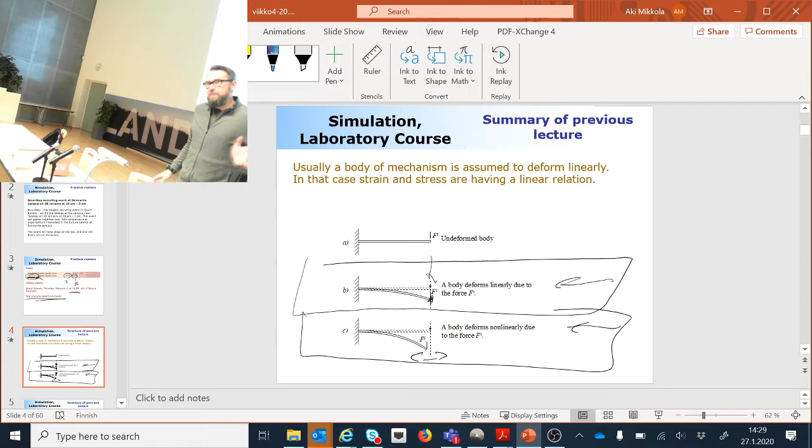Okay, so then last week we shortly looked at the lumped mass approach. And the lumped mass approach is a method that is, strictly speaking, not within the family of flexible multibody dynamics. And why is that? That's simply because the theory, the kinematics itself, has no changes with respect to rigid and flexible bodies. This method takes the original body, which usually has to be a beam-like body like this, and divides that into a number of rigid bodies. And between the rigid bodies, there are spring elements.

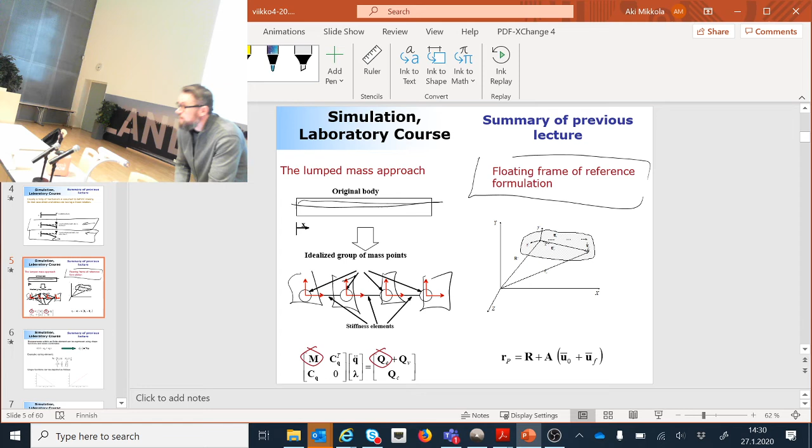So that's why there are no changes in the kinematics. You're just adding more components, bodies this time, and external applied forces. So that's all you need. The floating frame of reference formulation is what we're really going to take a look at in this class, and you really need to learn where the name floating is coming from.

We are changing the kinematics. So this is a kinematics that is using a floating frame reference formulation. And there is a big difference, seemingly small difference, because vector U bar now consists of two components: the one that shows where the particle is originally located, and then another component which shows the deformation of the particle. Seemingly just a little bit of tuning, adding one more component, but it changes everything, absolutely everything. And that's what we're gonna look at in this class.

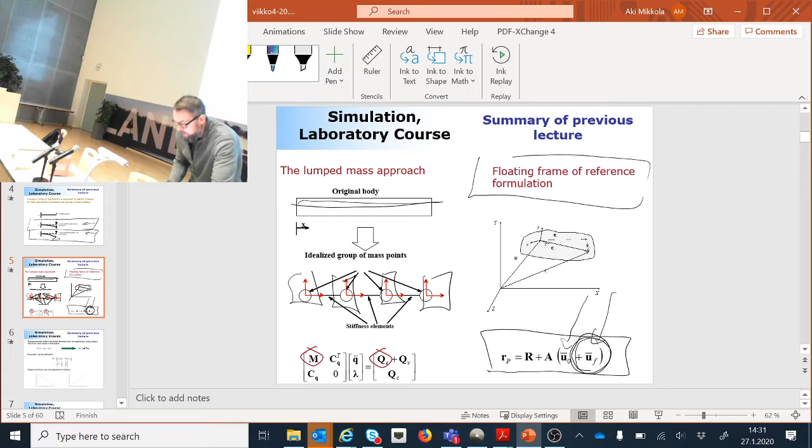And now, what we're gonna do is describe this deformation by using a finite element method. We already learned a little bit about the finite element method. Shortly speaking, the finite element method is all about the internal life of one element. Last week we looked at one simple spring-like element which has two nodes. Excuse my drawing. So one node here, another node here. And these nodes were able to move back and forth along the global x-axis direction. So it's an element like this.

So these nodes can move back and forth, and this is an element that consists of a total of 2 degrees of freedom. Where do these 2 degrees of freedom come from? This node here can move left or right, so that's 1 degree. This node here can move left or right, so that's another degree. Now, if I would add one more node in the middle, this would be an element that consists of a total of 4 degrees of freedom.

Correct. 3, exactly. I was just checking if you're still alive.

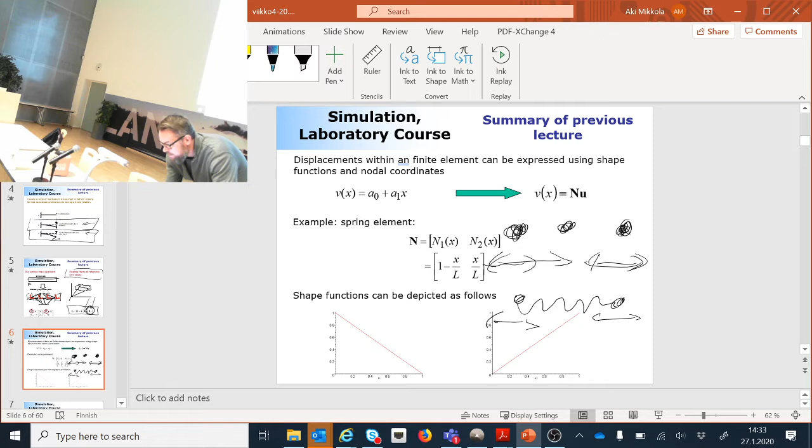3 degrees of freedom. And where they come from: this one can move back and forth, this can move back and forth, this can move back and forth. That's it. Now we know the number of degrees of freedom. What we will do next is approximate the internal life, like the soul of this element, by using polynomial expansion. The polynomial expansion in this case is selected such that I have a constant value, a0, and then a value that is linearly related to x, so a1 multiplied by x. This is my polynomial expansion, and this is really the soul of the finite element method.

I could use this polynomial as it is and solve the unknowns, and the unknowns this time are a0 and a1. That would be the end of the story. The problem with these unknowns is that there is no clear interpretation in real life. If you get a1 and a0, what does that mean in real life, what kind of deformation? Of course we can think about it, but there is no clear physical interpretation. So that's why it makes sense to convert these unknowns to be expressed by nodal degrees of freedom. And that's exactly what we did last week.

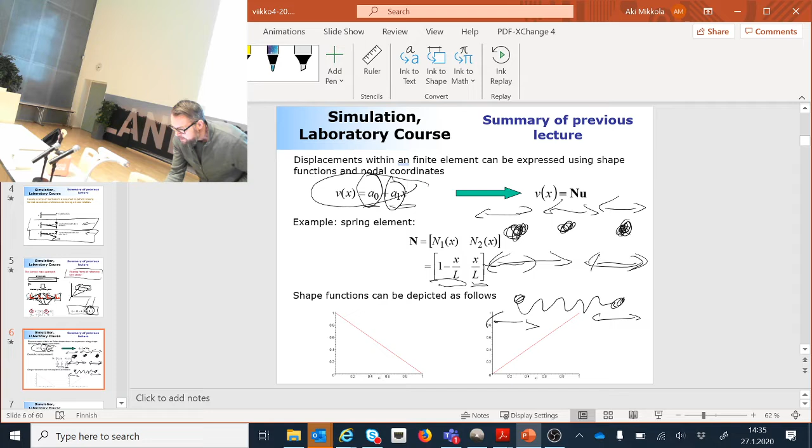Okay, so quite far off. So you say that I can go as far as I want. No limitation. That's not true. There's a limitation. So where should I? Let's try this again, because I was kind of hearing that someone was saying stop here. Okay, let's try again.

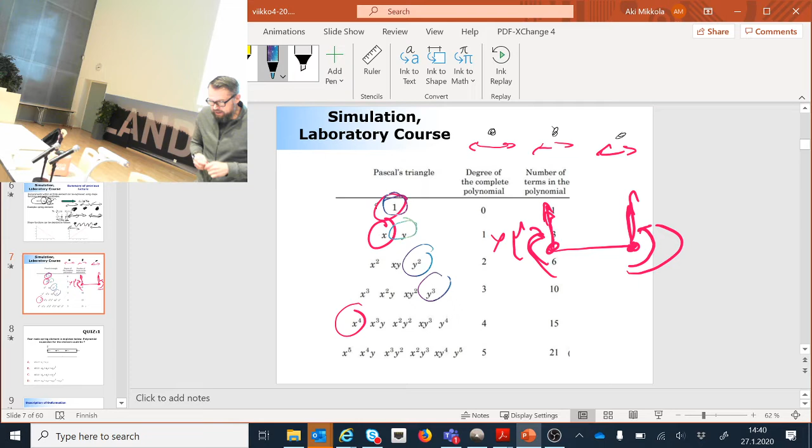Okay, here's a question to you. Now, I have a spring element, and I'm having 4 nodes, and I'm asking what kind of polynomial expansion I can use to create the shape function. Only one is correct. Let me put the Socrative on.

Oh, the Socrative is, okay, so hopefully this works fine. What? Is it that I don't have internet access? No, I should have internet access, because I'm streaming all the time, so it should not be a big issue. Huh. What's going on? It works fine. Okay. This one. Okay, so I can see that you're pretty much all in. Oh yeah, but this makes no sense to look at that. So let's look at something else.

Let's look at this one. So I have a 4 node spring element, meaning that the elements can move only left and right. So what is a polynomial expansion for this problem? You already know what's the correct answer? Should I take a look at how my Socrative is here? Okay, so half done, half is still thinking. This is not that simple, is it? Semi-simple, let's put it this way. Why this is confusing, I will tell you in a minute.

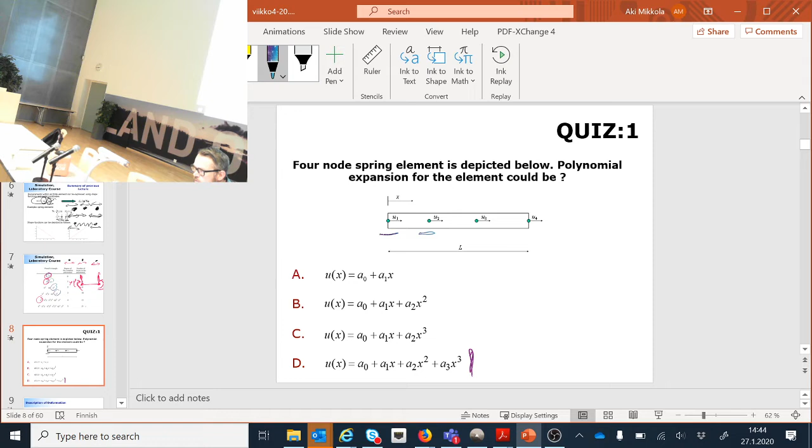And now here I have 1, 2, 3, 4 degrees of freedom. So my polynomial expansion must have 4 components, because I have 4 unknowns. Now, this is not good because it consists of 2 unknowns. I cannot select that. This one is no good because it consists of, again, 3 unknowns. This consists of 3 unknowns as well.

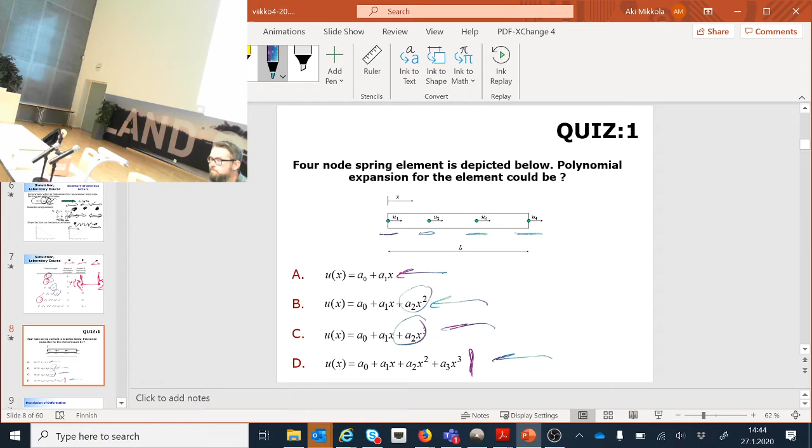I know that this is what makes you confused, but you should not get confused about that. This is the only one that consists of that number of unknowns. Okay, so let's move on. Let's look at something else.

Now, here is a beam element, and this beam element is exactly like I explained in a previous slide. So this is the one that consists of 4 degrees of freedom. These 4 degrees of freedom are translation along the global y-axis direction in this node, and the same in this node, and then the rotation in the first node and the second node.

So you already know what's the polynomial expansion for this kind of element. It's a polynomial expansion that consists of 4 components. Correct. Now what I will do with this polynomial expansion, I will change my polynomial coefficients to be expressed by nodal degrees of freedom. That will give me shape functions. And the shape functions tell me how the particles are moving with respect to each other in different kinds of scenarios. And these scenarios are all related to nodal degrees of freedom.

That's it. Then this will be later used mechanically to derive the stiffness and mass matrix, whatever you want. But that's mechanical, very mechanical. The only thinking you need to do is when you select the polynomials and understanding how the polynomials will affect the shape functions.

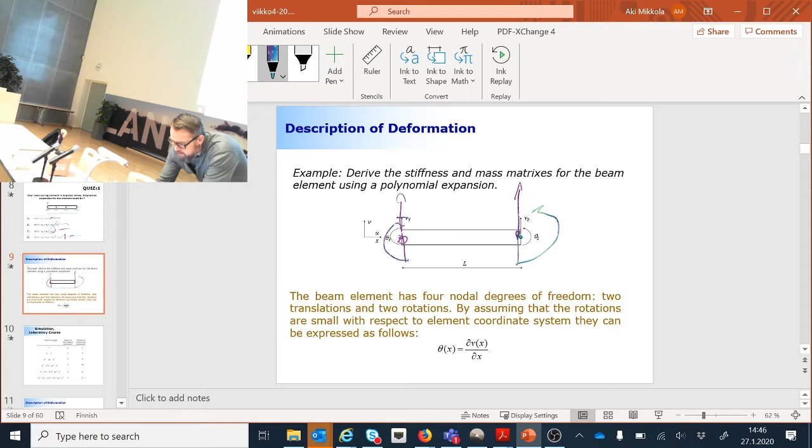All right, so now here is an element where I'm assuming this motion in the y direction and angle to be related via this kind of partial differentiation. This is a common assumption if you're dealing with an element that is not able to describe transverse shear deformation. We are not going to move deeper in that direction, but strictly speaking, elements can be divided into conventional elements like the Bernoulli beam element that cannot describe transverse shear deformation, and Timoshenko beam elements that can capture transverse shear deformation. But let's just leave it at that level this time.

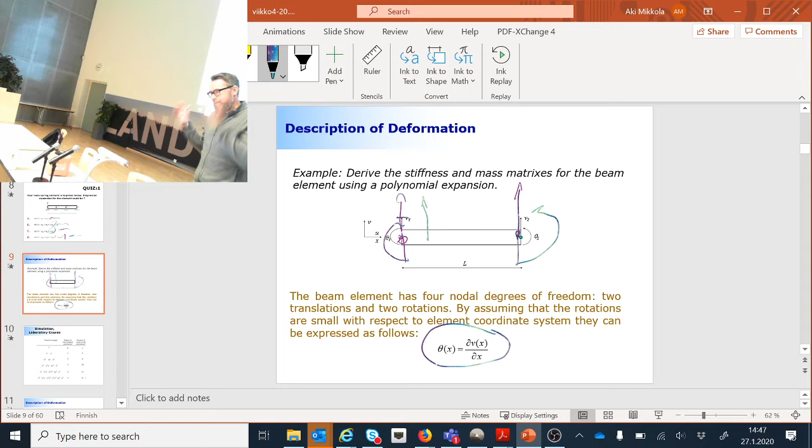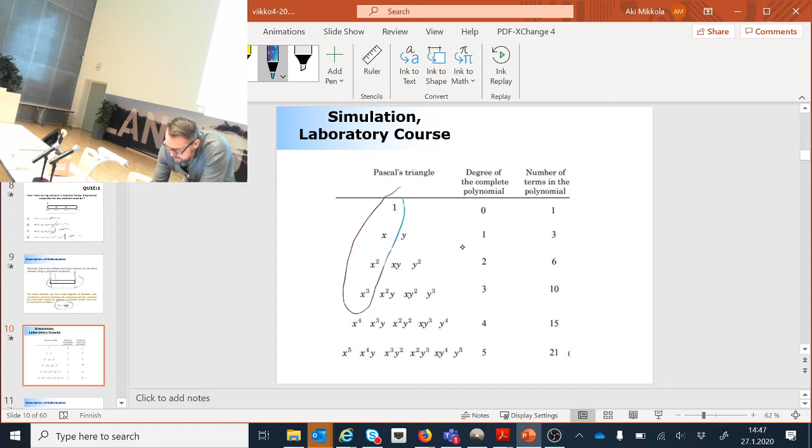Okay, now a bit confusing is that I'm going to select my x coordinates, the one that I'm describing my motion in this y direction. I, of course, realized later that I should use these y coordinates. Again, I can select 4 components, and I'm going to select them like shown here. Okay, that's it. Now, here is something that I need to get back to a little later. You need to remind me to get back to this.

Yeah, so we still have plenty of time, so no worries.

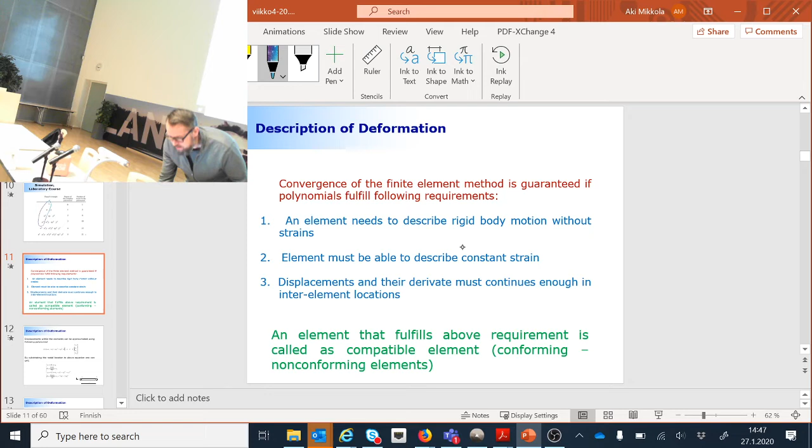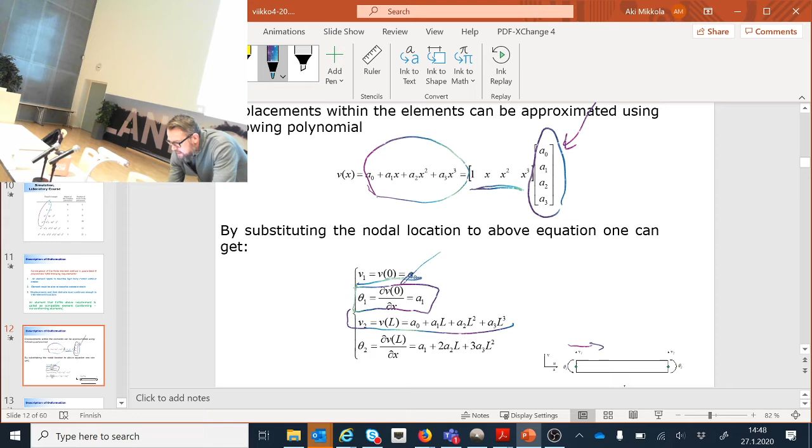I can make it happen by using the information about where these nodes are located. The first node is located where x is equal to 0. x is measuring this direction, so it's going to give me this equation. The next one is the equation differentiated with respect to x, and x again is 0. And then this one here is when x is equal to L, and the same thing here when x is equal to L. Now, here are my nodal degrees of freedom and my polynomial coefficients. This is a matrix that I need to invert in order to find the relation between these 2 items.

And remember this famous thing about a matrix that consists of 48 times 48 components. That's what I was doing. Now it's already becoming harder because this is 4 times 4. But it's nowhere near the nightmare that you're facing when it is this much. Still every now and then I wake up in the middle of the night and I can see these numbers in my dreams. So they are devil's numbers.

Okay, so now here's my A. I will just go and substitute that into this equation. It gives me shape functions.

Now, this is how the shape functions look in this beam element case. And now comes something that is very important. These shape functions are orthogonal in the sense that if I look at the first shape function, which is written here, this is the one that is associated to the y displacement in my first nodal degree of freedom. It is not introducing displacement to any other nodal degree of freedom. And that's something that is very important.

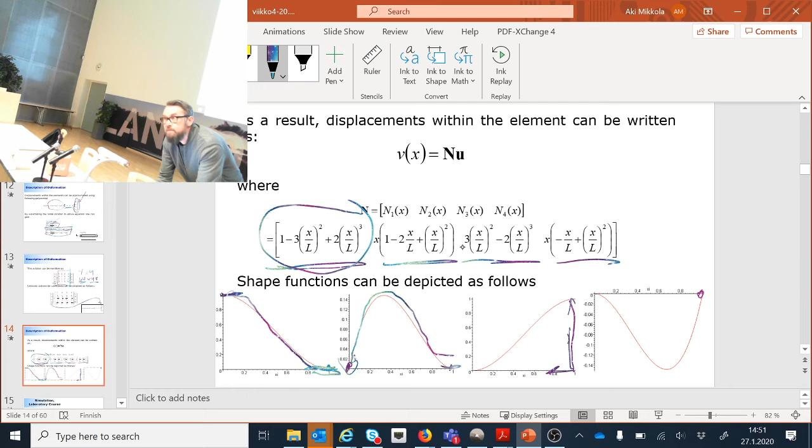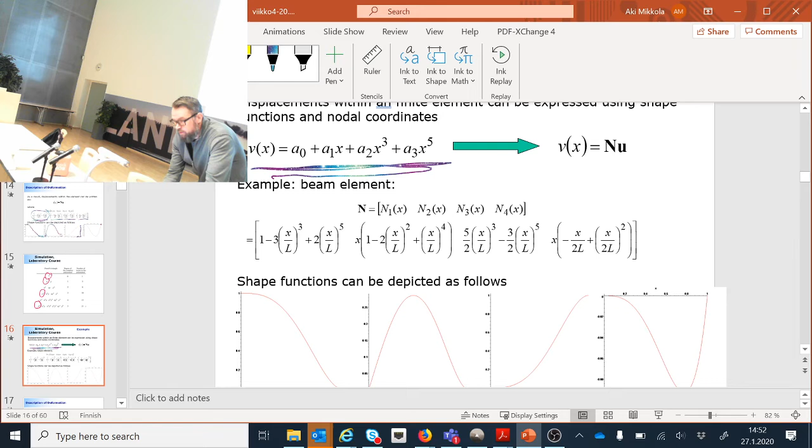Okay, so let's see. Is it going to be any different? Yes, it will be different. Now it's going to be a little hard to see how it is different, but if you go and compare the behavior pattern in this case and the previous case, they look different. Which one is correct? This is, by the way, an awfully difficult question.

Now, give it a shot, because I can promise you this. If you can answer this correctly, next Monday there's a lot of candies. Because I go on Tuesday and collect a lot of candies and bring them to you.

Which is correct? You said the first one. Others? You say both? Come on, both. Is it possible? Because in mathematics, it's only left or right, but not both. Can you select both? Yes, you can. Both.

Candies. So it's a candy party.

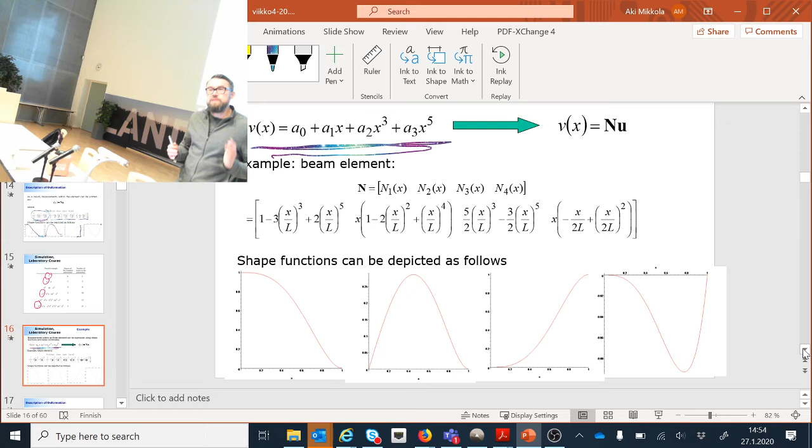Nice. So both are correct. They're different, but they're correct. I'm not violating any of the principles when I do this. They most probably behave in a very different way. And to be able to answer how they behave differently, we need to look at something that is called convergence. The finite element method is an approximate method, and it produces better and better solutions when you're increasing the number of elements. And typically, displacement-based elements approach the correct solution from the stiff side.

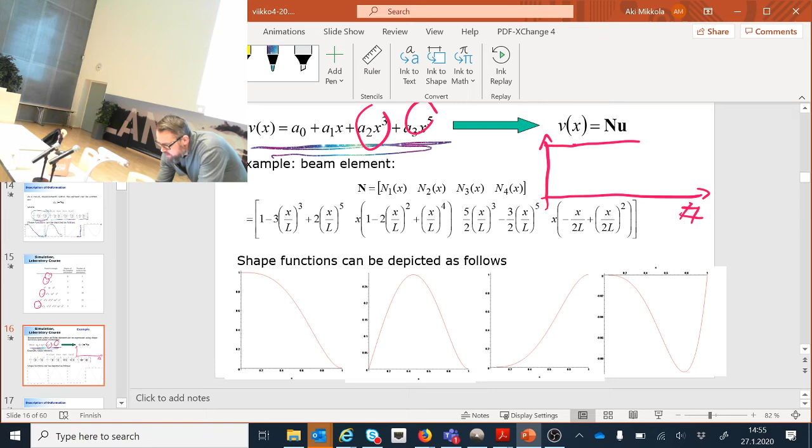But if I'm selecting these polynomials like I did in this case, third order and fifth order, it is not guaranteed that it approaches the correct solution from the stiff side. It could actually approach the solution from the other side as well. Let me see if this becomes clear enough. So let's say that I have here number of elements, and here solution. And let's say that this is the correct solution. Typically you get a very stiff solution when you're using not enough elements.

So let me change the color here. So you typically get solution convergence that gets better and better like this. So it's able to produce better and better solutions when the number of elements is increasing. This is typically how the element behaves if you're selecting these polynomials in the order they come directly, without any skipping.

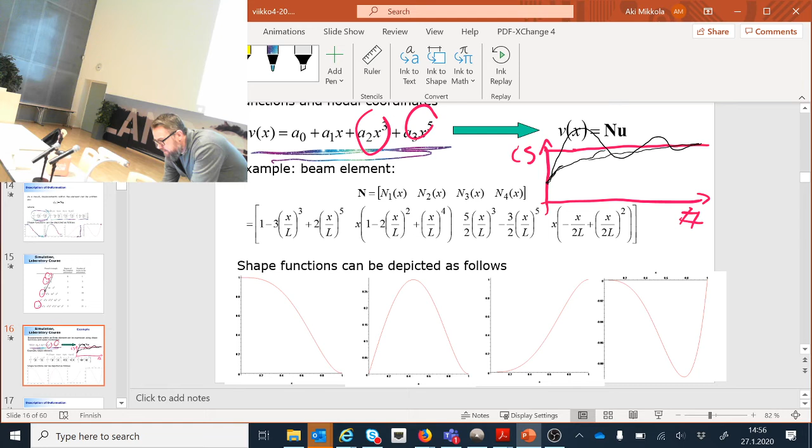Conformal elements, that's how they are called. But then there is a family of non-conformal elements that can approach the correct solution, for example, this way. They started here, but they're vibrating around the correct solution, and then they converge to the right solution. It's possible too. The only way you can guarantee that they are converging from this side is by using conformal elements, meaning that the polynomials are selected in the proper order.

Okay, but again, like I tried to explain here, the finite element method is all about internal life, about nodes. And this internal life is all about the polynomials. Polynomials are defining how the finite element method is performing. You knew this already, at least on a certain level.

So you heard the story. How come you were able to select that both are correct then? I'm kind of sensing that there's a little bit of cheating from your side. No? Are you just that good? But no communication, no further communication. I understand that. All right.

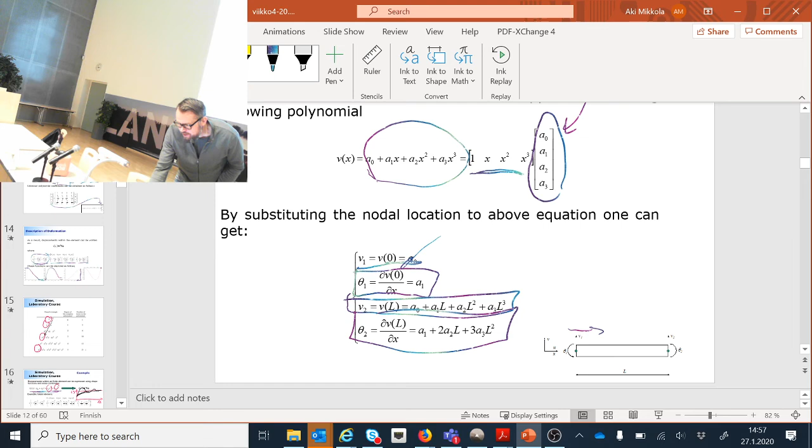Okay. Now, let's go back to this, and then we're going to move. Now, to be able to make an element that is converging, it's not guaranteed that you get an element that is converging, because if you select these polynomials randomly, then you can get really nice elements, but not converging to the correct solution, which is a really significant problem. But this is, by the way, not yet guaranteed, but you must be able to fulfill these minimum requirements to have elements that are able to converge.

The first one is the element has to be able to describe a rigid body motion without strain. This one here. Okay, now you should not mix this with rigid body motion in multibody dynamics. It means that if the element is in this configuration or this configuration with respect to the global coordinate system, it should not give any strains. So if I have no deformation in this configuration or in this configuration, they should behave in the same way. How can you guarantee that? By selecting polynomials from this Pascal's triangle such that the first component is this one here. This guarantees that the element can describe rigid body motion. So it's not a function of body displacement or orientation.

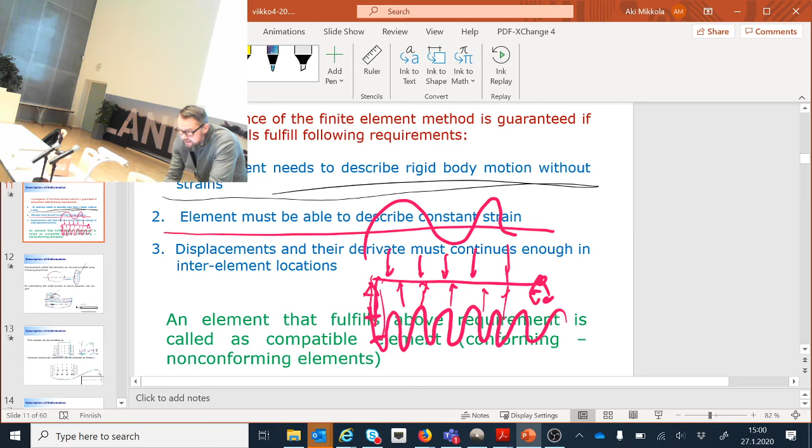Then the final one really depends on your application, because it says here that displacements and their derivatives must be continuous enough at inter-element locations. Meaning that within neighboring elements, there cannot be gaps. And that really depends on what kind of mathematics you need to describe the stiffness matrix and the inertia matrix. But let's look at the final requirement a little later. Now, if I'm selecting these polynomial orders as they are, then I end up with a conforming element. And if I select them in a more random way, I have non-conforming elements. That's how it goes.

So, we were here. Now, in this case, this particular beam element, I'm describing my strain displacement relationship, first of all, such that my displacement and rotation angle are related using this equation. Let me make a better drawing here. So I'm simply looking at the midline of the element. I'm looking at, for example, this line here.

In order to compute this tangential here, I can do that with my partial operation like shown here, right? This gives me the tangent of this middle line. Now, if I'm using the skew symmetric matrix in the planar case, if I rotate that by 90 degrees, I will get something that is perpendicular to my tangent, right? And that I can do by adding the minus here. Let's just simplify it like that.

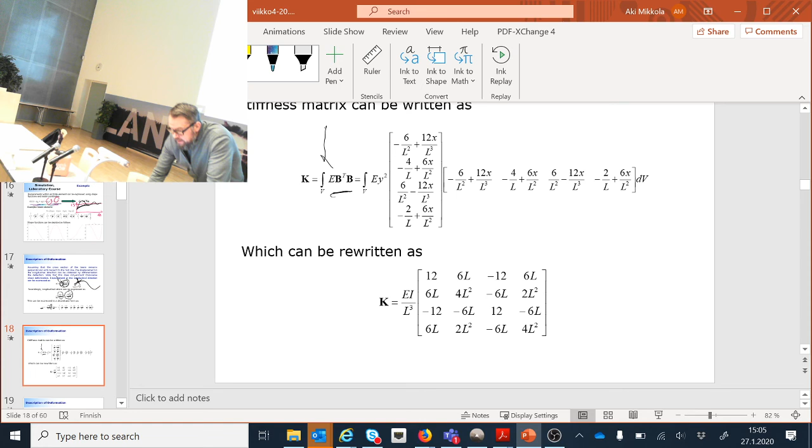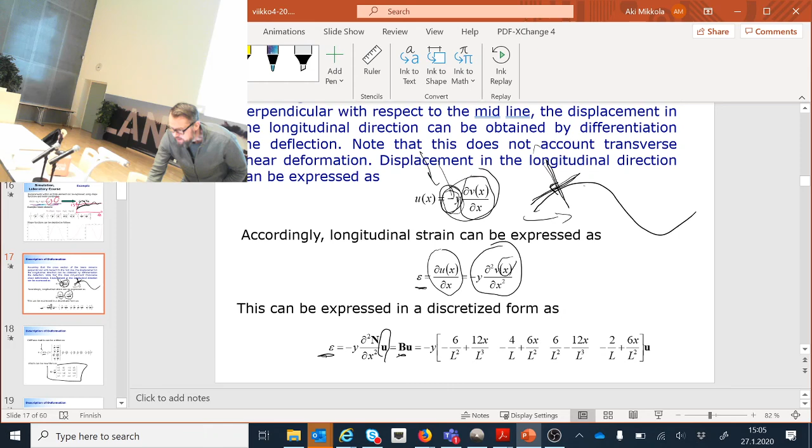All right, that's what I need in order to compute the stiffness matrix, and I can get the stiffness matrix by simply taking the kinematic matrix and its transpose and multiplying like shown here, and then I have my elastic coefficient, and that's it. That's going to give me the stiffness matrix like shown here. It's very mechanical, and you use a symbolic math tool, so it's very straightforward. The only thing that is not straightforward is the selection of polynomials. The rest is mechanical.

Okay. Now, this is where we're going to stop, because we need to discuss something very different from the finite element method. So this was a news flash, or introduction to the finite element method. And this is the level of difficulty at which we're going to leave the finite element method. No more difficult than that. Let me summarize this, because I want to keep on repeating.

So the finite element method is all about how you're assuming particles between the nodal locations are behaving. This behavior can be described with the help of polynomials. And it doesn't matter what kind of element you're looking at, it's always the same story. If you're looking at the plate element, like this, 4 nodes, and these 4 nodes may have rotational degrees of freedom as well. Same thing, it's all about the polynomials.

Then, once you have the polynomials, you're expressing polynomial coefficients with the help of nodal degrees of freedom. What you're going to get is a shape function. Shape functions give you the stiffness matrix once you have this kinematic matrix. That's it. That's the finite element method. I mean, that's the displacement-based finite element method. There are other types as well, but for sure we are not going to touch those.

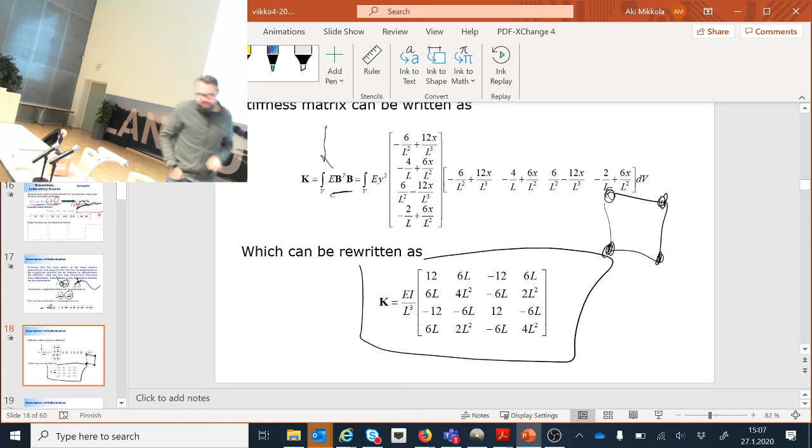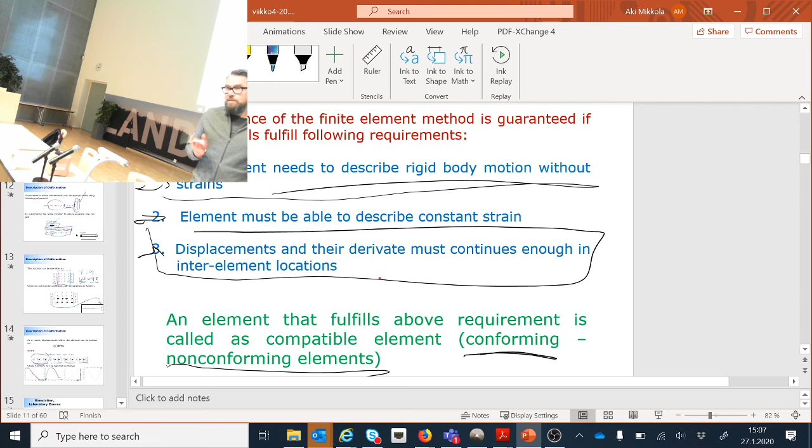For sure we are not going to touch shear deformable elements because they are painful. No, I say that it's possible that you can get good performance when you fulfill these 3 requirements, but not necessarily. There are still some problems that the finite element method is suffering every now and then. And it is suffering something that you may have heard about, and it's called locking. So it's, again, not a mechanical lock, but a numerical lock. A numerical lock is something that is quite severe, and it can lead to a situation where the prediction is very incorrect.

Okay, so now remember this story about the 48 times 48, so that was a painful thing. There was another painful event that happened when I was a postdoc in Chicago. It was a shameful event. Can I share that with you? And it ended up to be a very happy event. This is a little bit of a personal story, not on my side, but someone else in this department. So still I'm going to share this with you. Because I was there under this most famous professor in the field of computational dynamics. Well, at least a really, really famous guy.

And then one student from Finland came to Chicago, and he got the simplest possible task. The simplest possible task was to verify that this method that was using this high number of degrees of freedom is performing well. So really something that needs no particular skills. You just take the solution and a commercial finite element software, and then you compute the simple examples with this new method and the commercial finite element software, and you compare them. And of course, the idea is to get exactly the same solution, right? Because everything went perfectly.